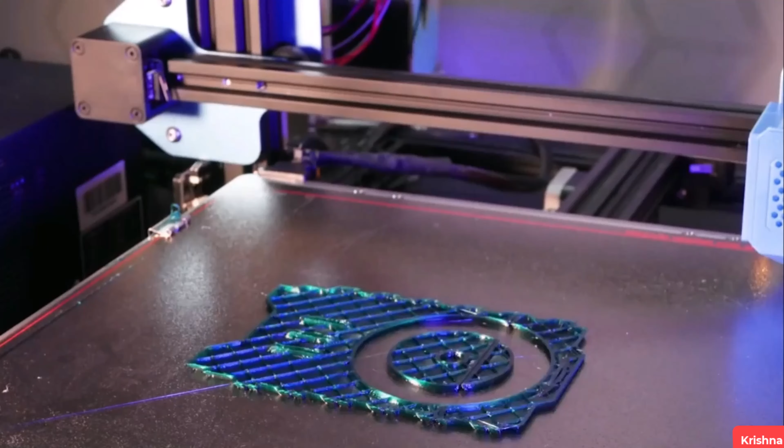In the 20th century, no other invention affected mankind more than technology did. With the advent of computers in the 1950s and the internet in the 1990s, the fundamental way of doing things has gone through a massive change. These technologies made our lives better, opened up new avenues and possibilities, and gave us a hope for the future. But it generally takes decades for an ecosystem to be built across a particular technology, to take it to the masses and achieve the truly disruptive nature of that technology.

It is widely believed that 3D printing or additive manufacturing has the vast potential to become one of these technologies. Now, what really is this 3D printing that some have claimed will put an end to traditional manufacturing as we know it, revolutionize design and impose geopolitical, economic, social, demographic and environmental implications on our everyday lives?

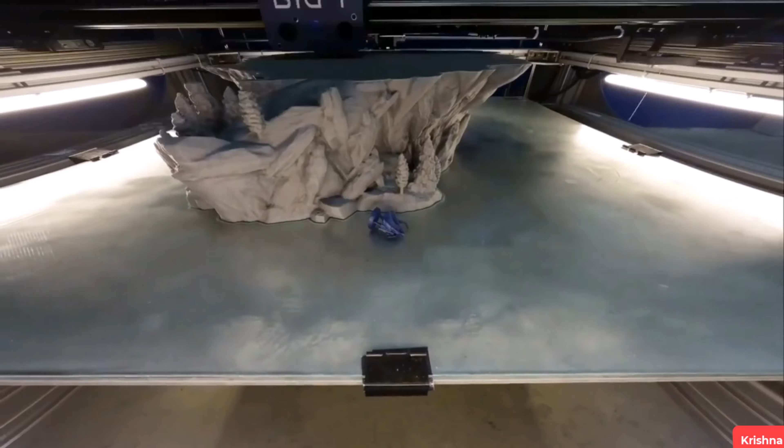The most basic differentiating principle behind 3D printing technology is that it is an additive manufacturing process. And this is indeed the key, because 3D printing is a radically different manufacturing method based on advanced technology that builds up parts additively in layers at the sub-millimeter scale. This is fundamentally different from any other existing traditional manufacturing techniques.

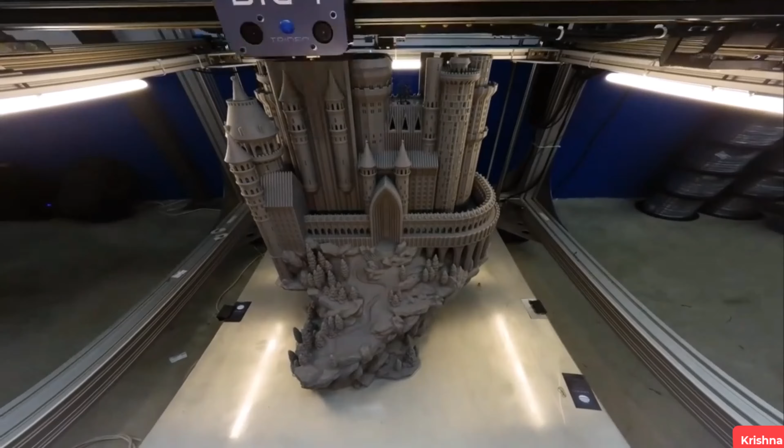Traditional manufacturing processes have evolved a lot over time, from hand-based manufacturing to automated processes such as machining, casting, forming and molding. Yet these technologies all demand subtracting material from a larger block, whether to achieve the end product itself or to produce a tool for casting or molding processes. And this is a serious limitation within the overall manufacturing ecosystem.

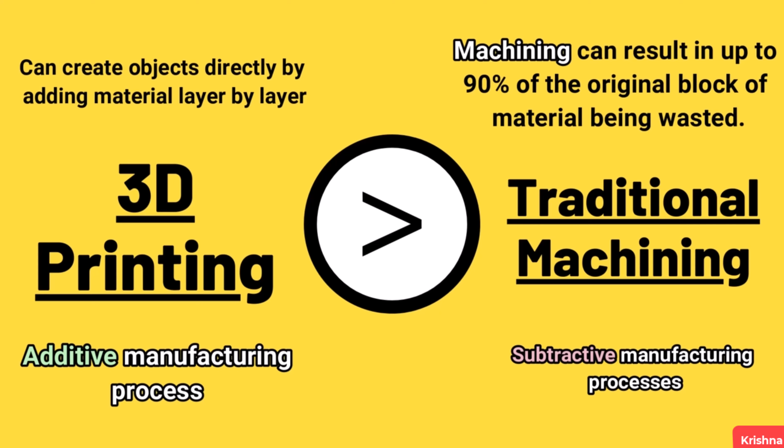For many applications, traditional design and production processes impose a number of unacceptable constraints, including expensive tooling, fixtures, and the need for assembly for complex parts. In addition, subtractive manufacturing processes, such as machining, can result in up to 90% of the original block of material being wasted. In contrast, the 3D printing process can create objects directly by adding material layer by layer in a variety of ways depending on the technology used.

3D printing is an enabling technology that encourages and drives innovation with unprecedented design freedom, while being a tool-less process that reduces prohibitive cost and lead times. Components can be designed specifically to avoid assembly requirements, with intricate geometry and complex features created at no extra cost. 3D printing is also emerging as an energy-efficient technology that can provide environmental efficiencies in terms of both the manufacturing process itself, utilizing up to 90% of standard material, and throughout the product's operating life through lighter and stronger design.

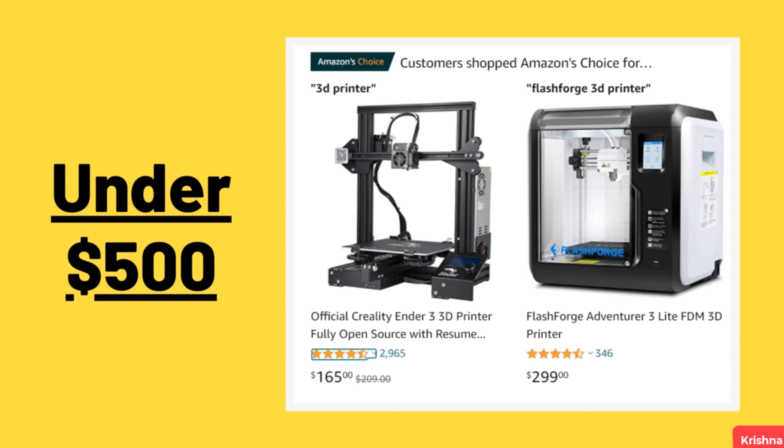In recent years, 3D printing has gone beyond being an industrial prototyping and manufacturing process as the technology has become more accessible to small companies and even individuals. Previously, only big corporates used to own 3D printers, as the scale and economics of owning a 3D printer made it prohibitive for smaller companies to own one. But with the rapid decline of printer cost, the technology has become even more affordable. Nowadays, smaller and less capable 3D printers can be acquired for under $500.

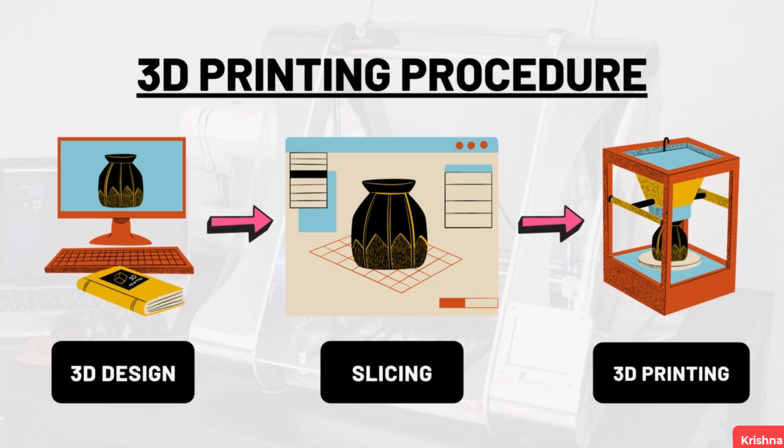This has opened up the technology to a much wider audience, and as the exponential adoption rate continues on all fronts, more and more systems, materials, applications and services are emerging. In the coming lectures, we will discuss various 3D printing processes in greater detail. The entire 3D printing technology can be divided into three steps: 3D design, slicing, and 3D printing.

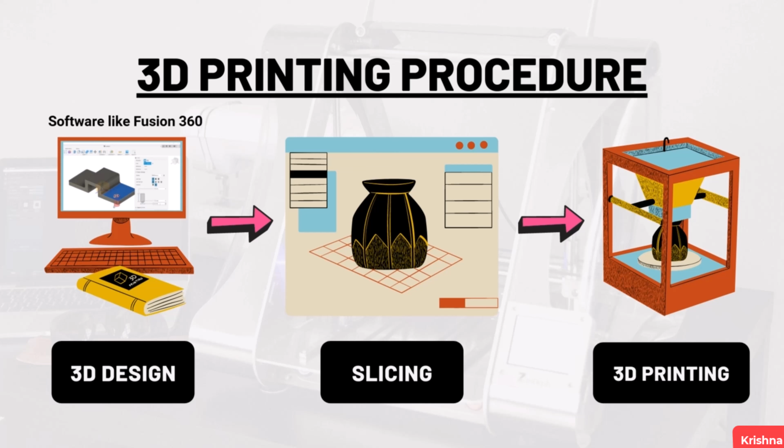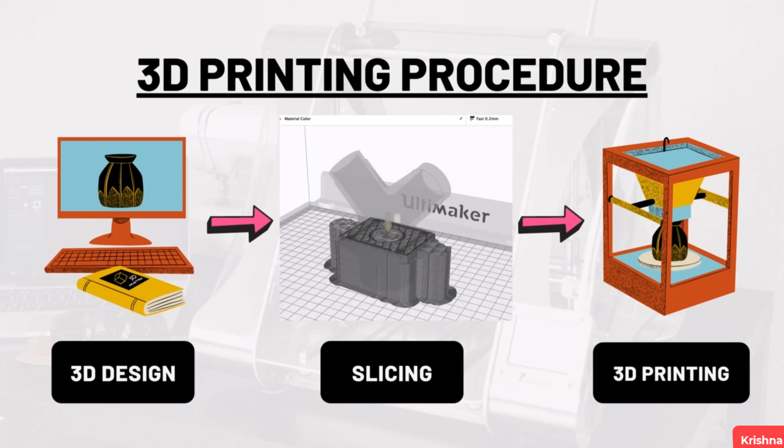A 3D digital model is the starting point for any 3D printing process. This digital model can be created using various 3D design software like Fusion 360 and SolidWorks, or can also be created using 3D scanning. Once the 3D model is created, it is then sliced into layers, thereby converting the design into a file readable by the 3D printer. This slicing is done by exporting the 3D model to another software like Ultimaker Cura. The 3D printer will then print this file layer by layer using the material given as input.

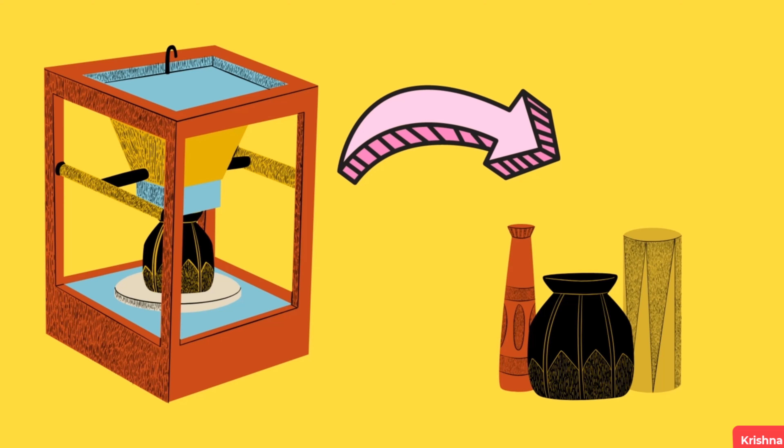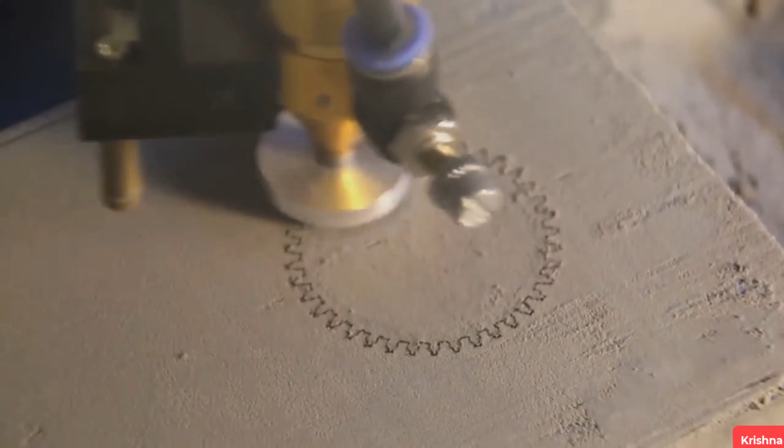The different types of 3D printers each employ a different technology that processes different materials in different ways. It is important to understand that one of the most basic limitations of 3D printing in terms of material and application is that there is no one solution that fits all. For example, some 3D printers process powdered material, utilizing a light source to sinter or melt layers of the powder together in the definite shape. Other processes require polymer resin material and again utilize a light or laser to solidify the resin in ultra-thin layers.

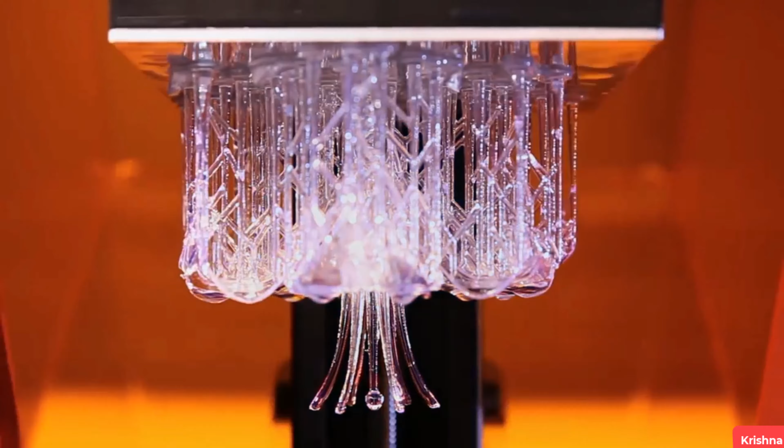Now, let's discuss some of the very famous 3D printing processes. First is SLA, or stereolithography.

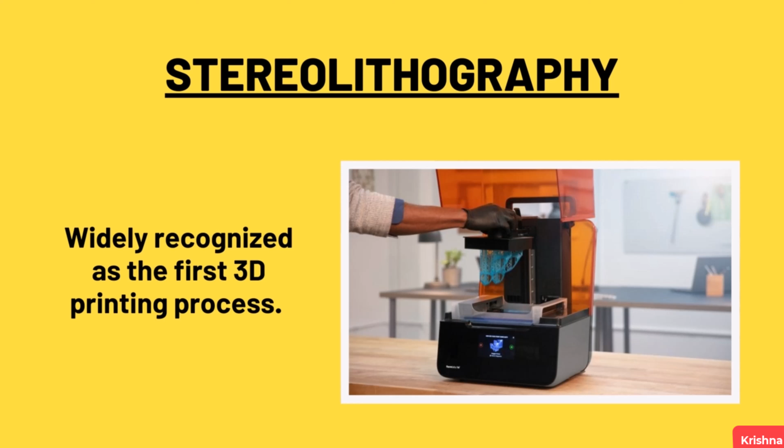Stereolithography is widely recognized as the first 3D printing process. It was certainly the first to be commercialized. SLA is a laser-based process that works with photopolymer resins that react with the laser and cure to form a solid in a very precise way.

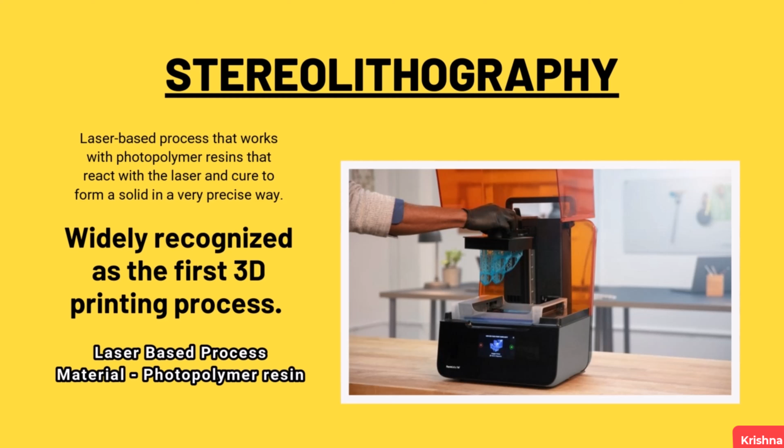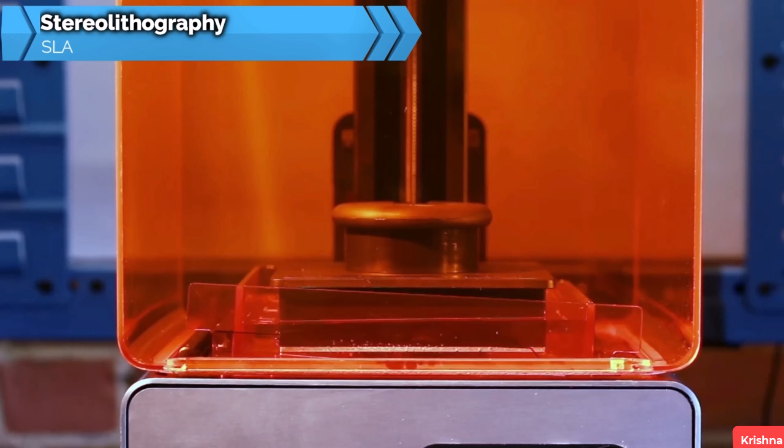It is a complex process, but simply put, the photopolymer resin is held in a vat with a movable platform inside. A laser beam is directed in the XY axis across the surface of the resin, according to the 3D data supplied to the machine. This 3D data is in the format of .stl file, whereby the resin hardens precisely where the laser hits the surface.

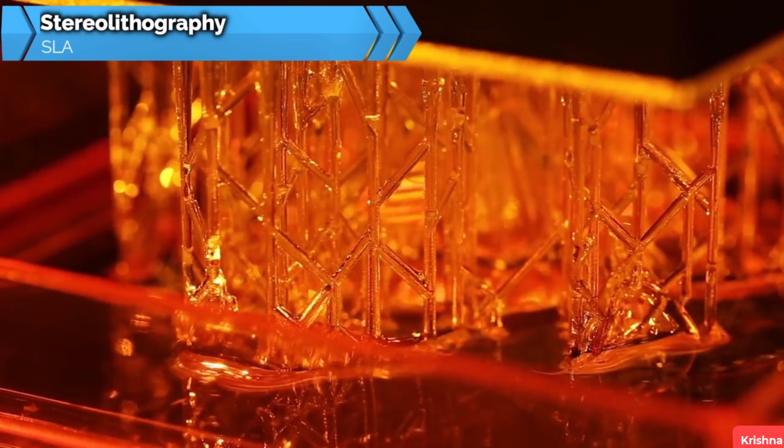Once the layer is completed, the platform within the vat drops down by a fraction in the Z axis, and the subsequent layer is traced out by the laser. This continues until the entire object is completed and the platform can be raised out of the vat for removal. Because of the nature of the SLA process, it requires support structures for some parts, specifically those with overhangs or undercuts. These structures need to be manually removed.

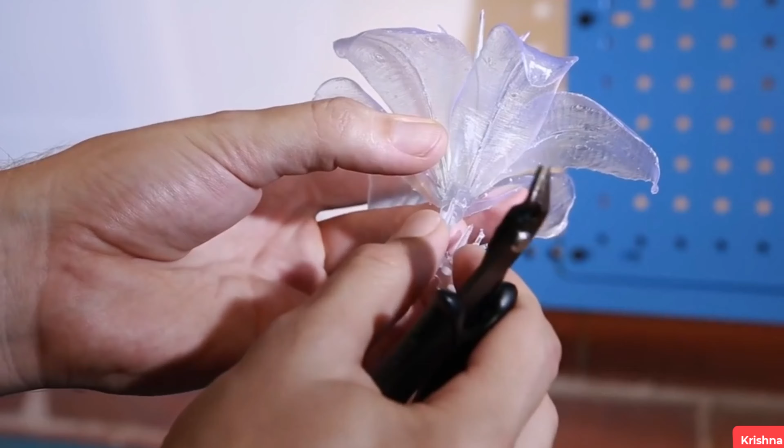In terms of other post-processing steps, many objects 3D printed using SLA need to be cleaned and cured. Curing involves subjecting the part to intense light in an oven-like machine to fully harden the resin. Stereolithography is generally accepted as being one of the most accurate 3D printing processes with excellent surface finish. However, limiting factors include the post-processing steps required and the stability of the materials over time, which can become more brittle.

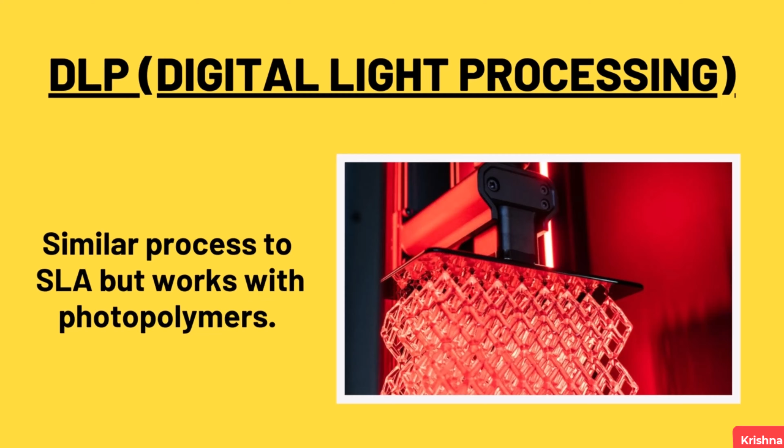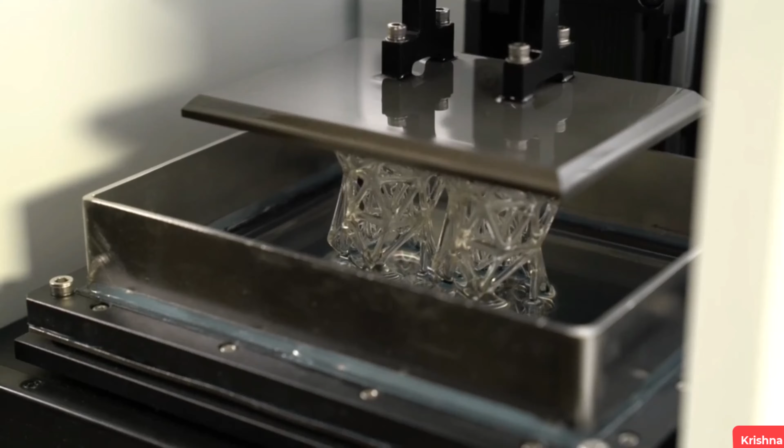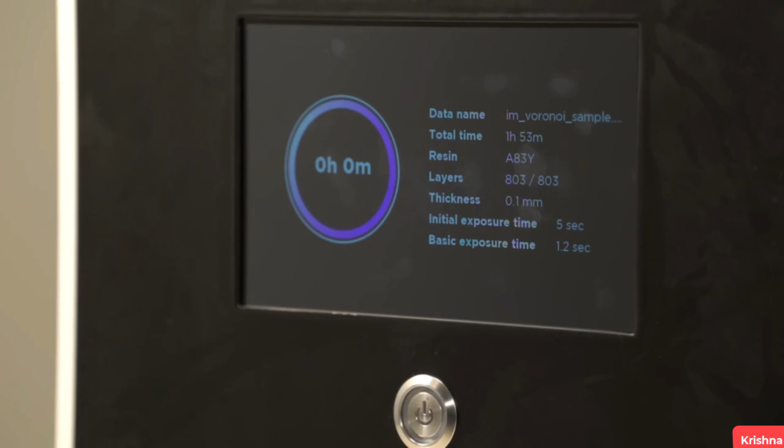DLP or digital light processing is a similar process to stereolithography in that it is a 3D printing process that works with photopolymers. The major difference is the light source. DLP uses a more conventional light source, such as an arc lamp with a liquid crystal display panel, which is applied to the entire surface of the vat of photopolymer resin in a single pass. This generally makes DLP faster than stereolithography.

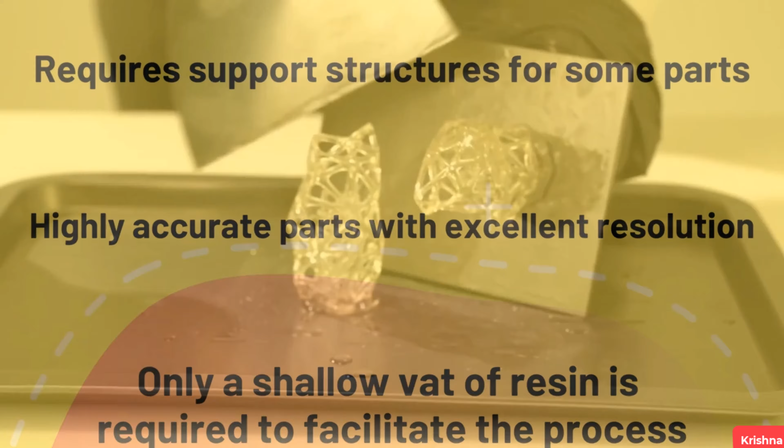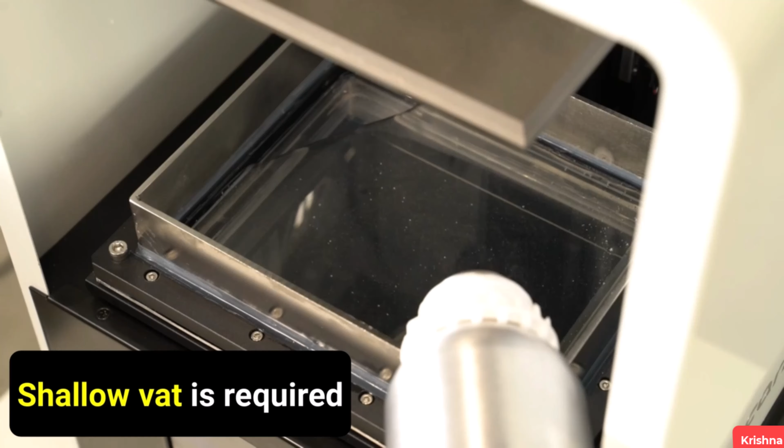Also, like SLA, DLP produces highly accurate parts with excellent resolution. But its similarities also include the same requirement for support structures and post-curing. However, one advantage of DLP over SLA is that only a shallow vat of resin is required to facilitate the process, which generally results in less wastage and lower running costs.

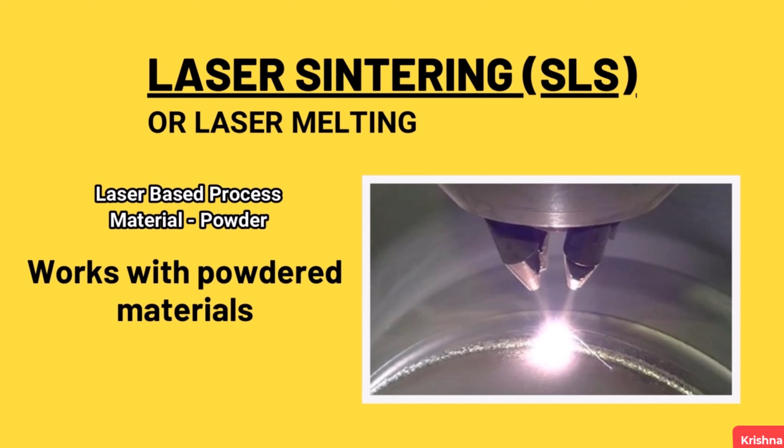The next process is laser sintering. Laser sintering and laser melting are interchangeable terms that refer to a laser-based 3D printing process that works with powdered materials. The laser is traced across a powder bed of tightly compacted powdered material, according to the 3D data fed to the machine in the XY axis. As the laser interacts with the surface of the powdered material, it sinters or fuses the particles to each other, forming a solid.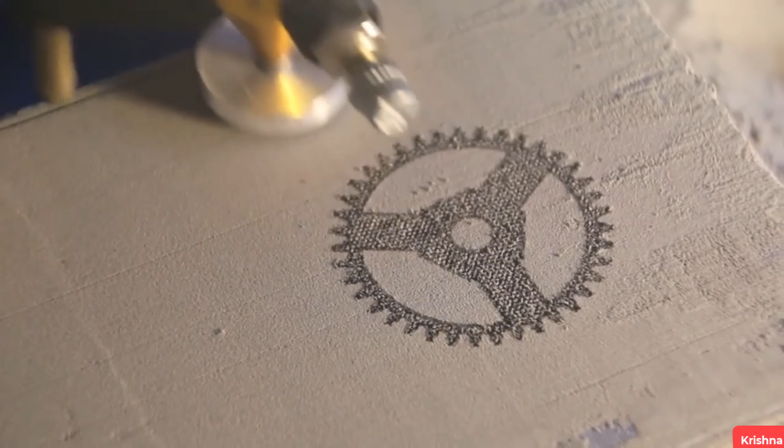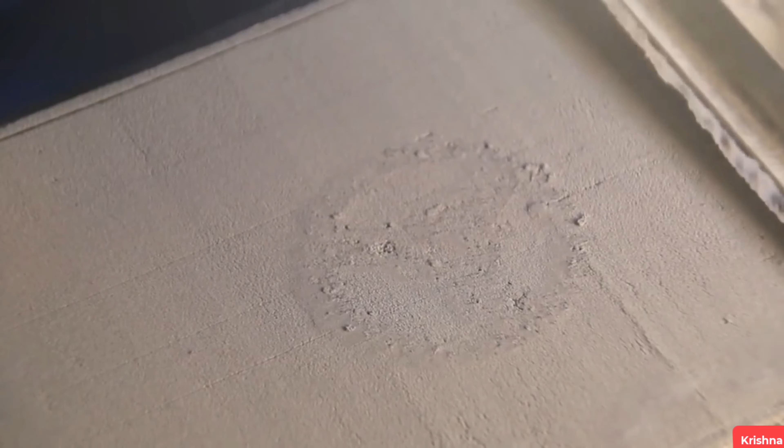As each layer is completed, the powder bed drops incrementally and a roller smoothens the powder over the surface of the bed prior to the next pass of the laser for the subsequent layer to be formed and fused with the previous layer. Once finished, the entire powder bed is removed from the machine and the excess powder can be removed to leave the printed parts. One of the key advantages of this process is that the powder bed serves as an in-process support structure for overhangs and undercuts, and therefore complex shapes that could not be manufactured in any other possible way can be manufactured with this process.

However, on the downside, because of the high temperatures required for laser sintering, cooling times can be considerably high. Furthermore, porosity has been a historical issue with this process, and while there have been significant improvements towards fully dense parts, some applications still need infiltration with another material to improve mechanical characteristics.

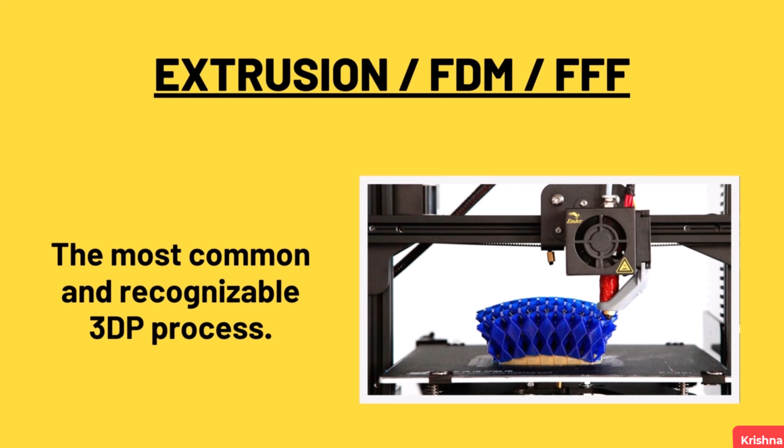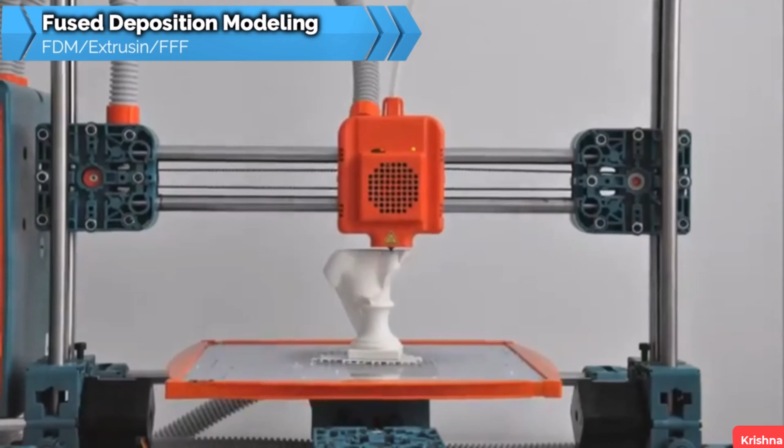3D printing utilizing the extrusion of thermoplastic material is easily the most common and recognizable 3D printing process. The most popular name for the process is fused deposition modeling. The process works by melting plastic filament that is deposited via a heated extruder, one layer at a time, onto a build platform according to the 3D data supplied to the printer. Each layer hardens as it is deposited and bonds to the previous layer. The most common materials for entry-level FDM 3D printers are ABS and PLA.

The FDM process requires support structures for any application with overhanging geometries. For FDM, this entails a second water-soluble material which allows support structures to be relatively easily washed away once the print is complete. Alternatively, breakaway support materials are also possible, which can be removed by manually snapping them off the part. The process can be slow for some part geometries, and layer-to-layer adhesion can be a problem, resulting in parts that are not watertight. Again, post-processing using acetone can resolve this issue.